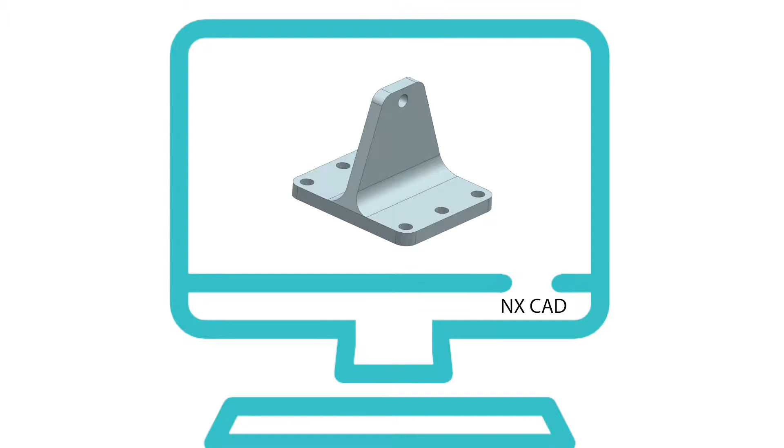One of the ways to achieve simulation-driven design is with topology optimization. With topology optimization, you don't begin with a design at all. Instead, a designer within NX CAD models the design space, meaning the package space that the design would ultimately live in, and simulates it based on expected loading conditions.

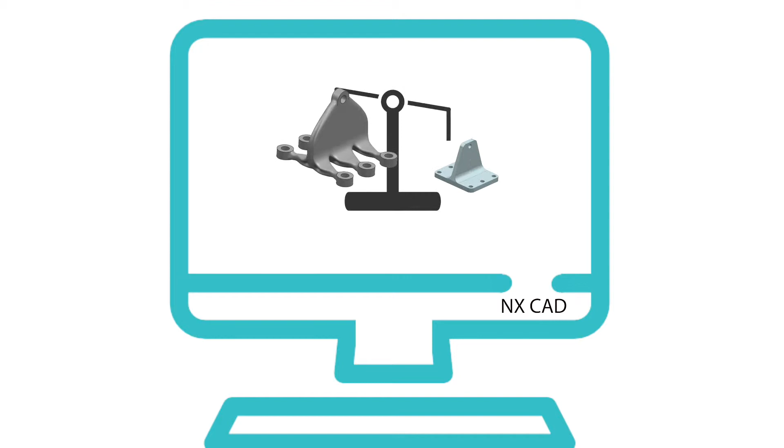The result is a completely new, conceptualized part geometry that meets structural performance requirements immediately, yet is lighter than the existing design. If you've never seen topology optimization before, this next demonstration will help to give you a better understanding of what it is and how it works.

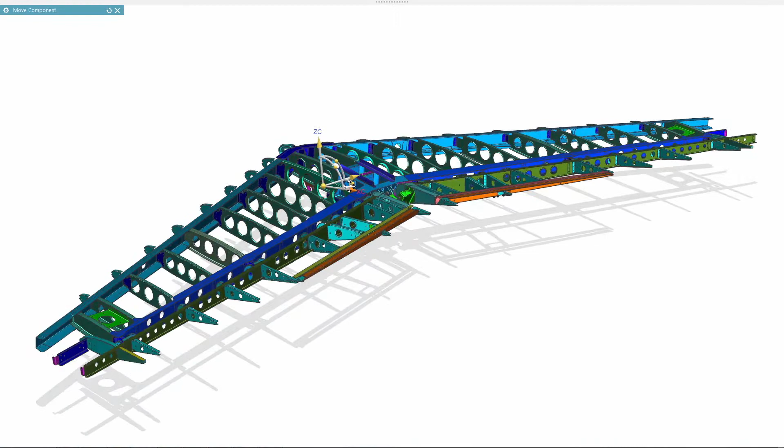A business jet developer is looking for ways to reduce weight of an aircraft that's currently under development, and they feel that the elevator bell crank could be just one of the components ready for a redesign. The elevator bell crank is a critical mechanical component that connects the actuation from the pilot's joystick directly to the elevators that control pitch, and you can see the original design here.

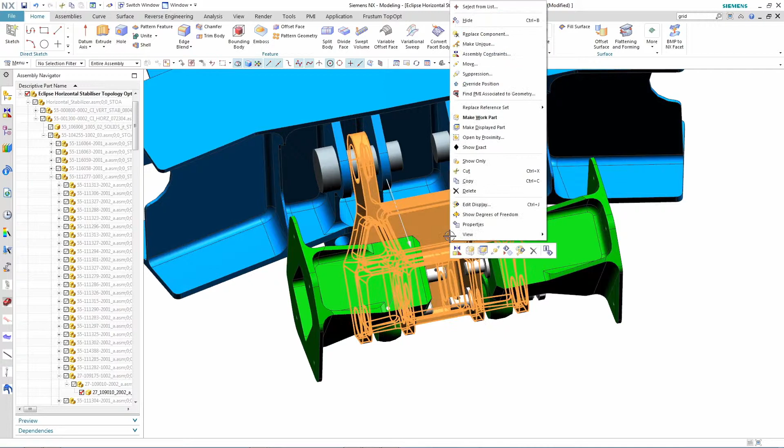But instead of using a designer's imagination for the redesign, they decide to use topology optimization to suggest a new potential design. To do this, the designer first starts with a model of the design space, meaning the area that the crank could fit within. In this case, the gray area is the design space, and only half of the design space is modeled since it's a symmetric part. The red area represents an area where we don't want the material to be placed for the design.

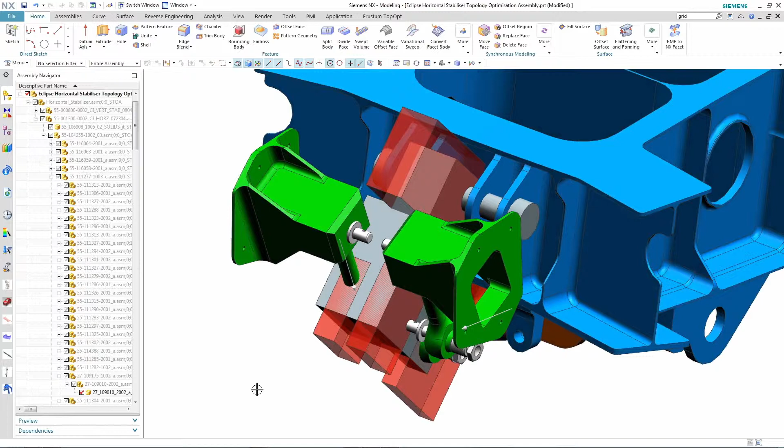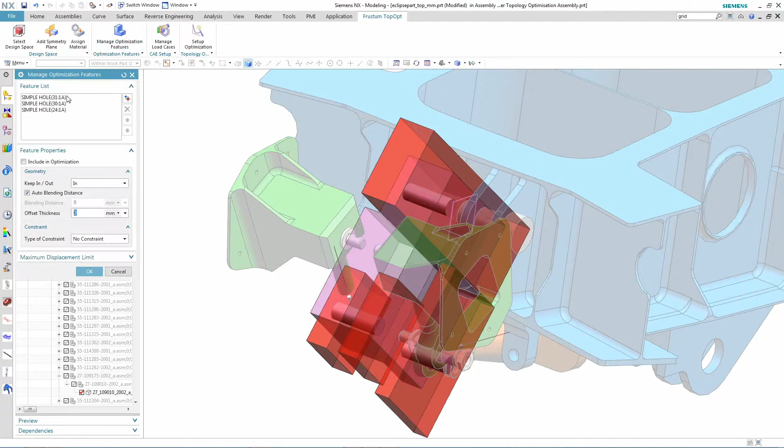The designer picks the topology optimization solution from the NX interface and follows the simple commands in the menu that are laid out in the steps of the process. The designer first identifies the design space, symmetry plane, and material for the design space. The designer also notes that there are pin connections within the design space, which the optimizer will then maintain as it determines the part shape. The designer also identifies the red areas as the keep-out zones.

Next, the designer defines loads that the part will experience at the pin connections. The final step before running the solution is to set up the optimization targets, which is set to 0.17 kilograms for this part. The topology optimization run is then submitted, and it takes some time for it to run through all of the iterations, which we've edited out here in this demo in the interest of time.

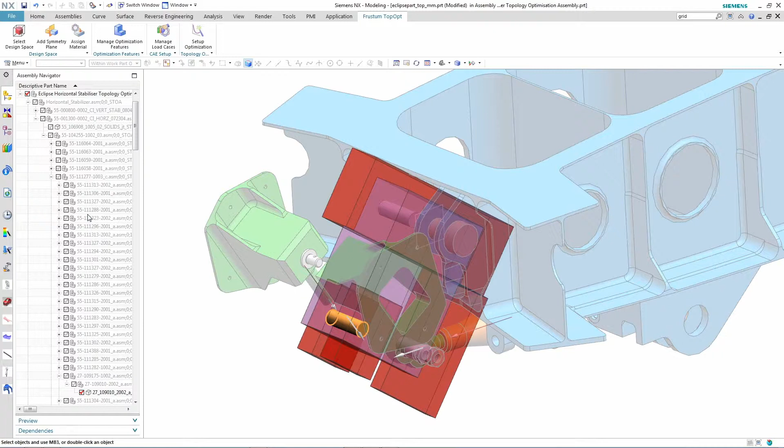Once the optimization is complete, the results of the new shape are created in the form of facet data, which we can then open in NX. You can see the new part here in blue. If we isolate the part and its design space, you can get a better feel for the new part shape and how it's radically different from the original shape.

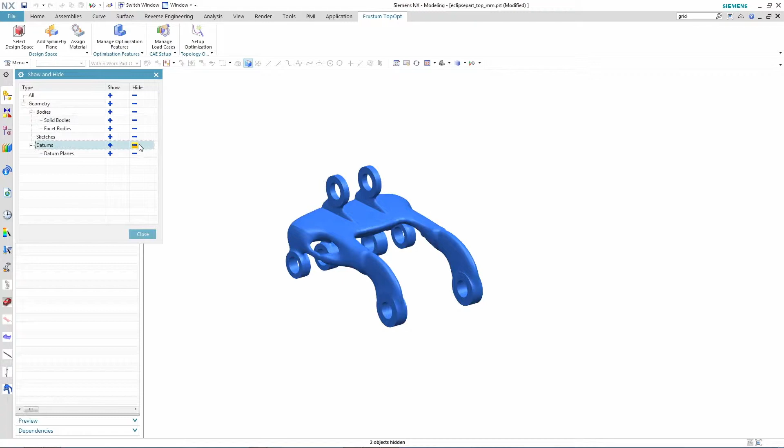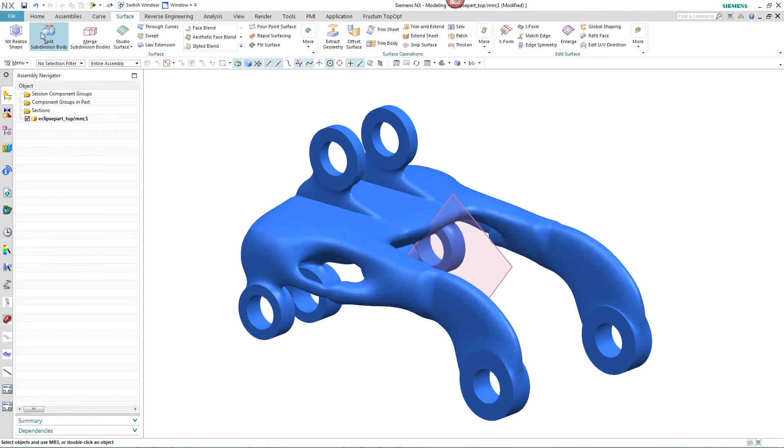Traditional CAD tools can't do precise design operations on facet models like this one. You would actually need to completely remodel this part in CAD using the facet model as a guide in order to get usable geometry that you can then refine. This slows down innovation. But with NX CAD, even though this part is in the form of facet data, we can continue to refine this shape by using convergent modeling.

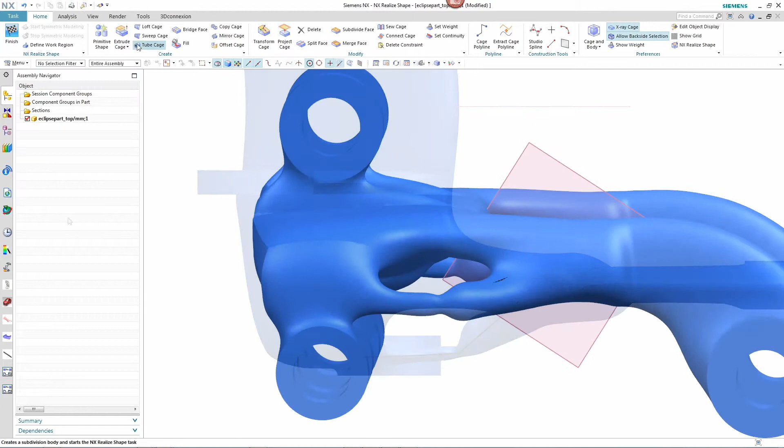In this example, the designer sees a need to beef up the material around the short connecting strands on each side of the part. So the designer decides to use the Realize Shape commands within NX to begin working to reshape the geometry here. The designer first begins by defining a tube cage around the section to be modified. With the cage in place, the designer transforms the shape by simply pulling and pushing the different vertices and faces of the cage to get a more desirable shape.

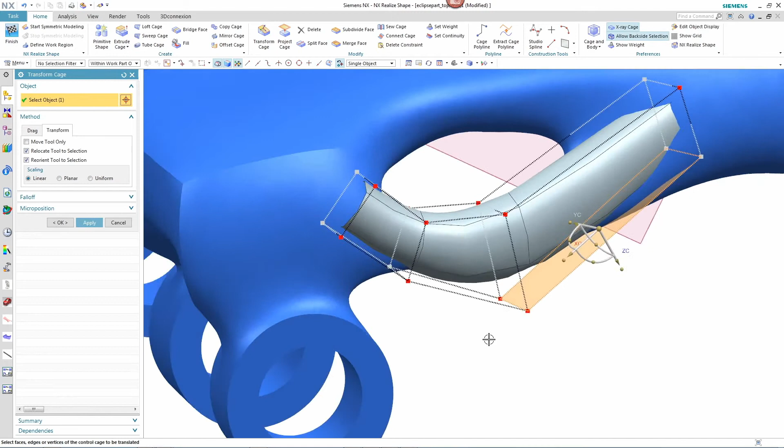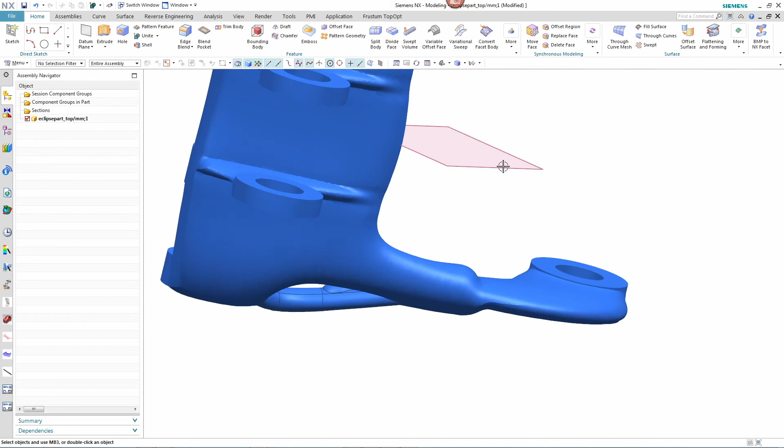Once the designer has the desired shape, the designer then can apply this to the other side of the part by defining a symmetry plane. Any further operations automatically get applied to both sides. Once complete, the designer unites the geometry with the part to create the final shape. Would you have been able to imagine this final shape on your own without simulation?